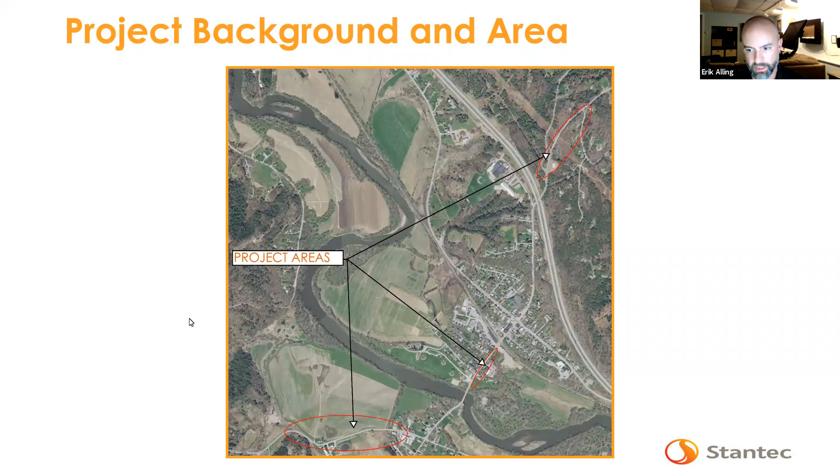All right, I'll jump in here and go through the project areas. As some of you may be aware, there are 3 separate project areas that we're looking at within this one study. Don't worry about trying to squint to see where we are. This is just the overhead view to show the 3, but we have one up on Jericho Road, one on Bridge Street, and one on Huntington Road.

The intent of this is not to be comprehensive existing conditions, it's just to set up the project areas, show some of the existing conditions, and then allow for any feedback, ideas, known issues or concerns with these areas. So starting with project area number 1, we have the entrance to the schools here, I-89, so we are looking at the westerly side of Jericho Road, up the hill and ending at Valley View Road.

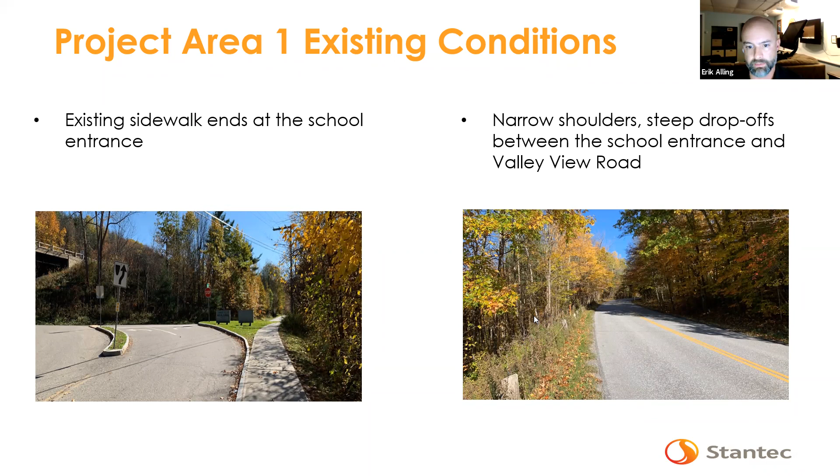Jumping down to street view, there is existing sidewalk on Jericho Road that heads down the hill toward the village. Going up the hill away from the school, the shoulders are quite narrow. There are steep drop-offs just outside of the unpaved shoulder, which you can sort of see here, and it shows up even better in the next picture.

The speed limit is 25 near the school, and it goes up to 35 as you head up the hill away from the school. About 1,100 vehicles per day travel this segment, and the town's right-of-way is 49.5 feet or 3 rods. We do have some overhead utilities to contend with along the side of the road we're looking at, so any alternative we develop will have to take that into account along with these steep drop-offs.

So that sets the stage for this one segment out of the 3. I'd love for people to jump in with any comments, concerns. I'd love to hear if anybody is using or knows of anybody who's using it currently as a pedestrian, or would use it if there were a facility, and any other issues related to pedestrian safety in this segment.

Are there going to be projections for potential use so that we can do a cost analysis in terms of the benefit to the town, in terms of the number of pedestrians that are going to use a sidewalk based upon the cost to construct?

That is typically a tough number to come up with, where there aren't some existing footpaths where people are already walking. We can do our best to estimate based on the number of houses that would connect to this directly, but full disclosure, it's going to be tough to come up with an accurate number.

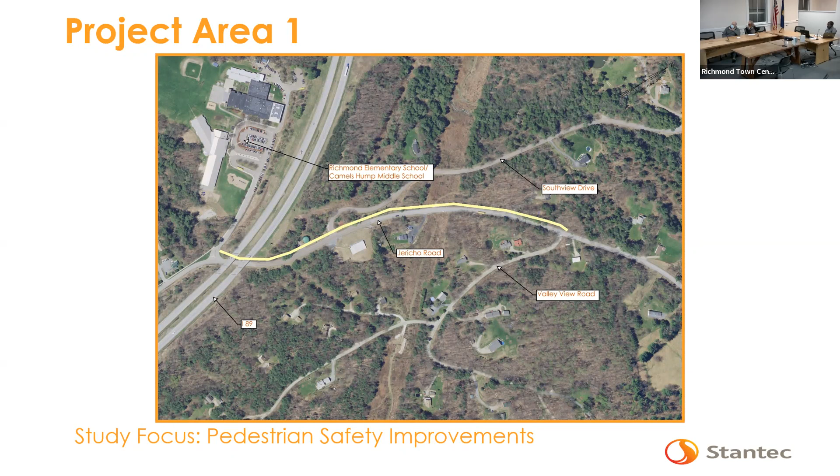Okay, thanks for that. Anything else on this segment? All right, if anybody thinks of anything, I'll leave some time at the very end where we can go through any of the three sections again.

So segment 2 is along Bridge Street. We're looking at the east side here. Jason did allude to the other scoping study, so it may look like we're missing a segment here because existing sidewalk currently ends right at the northern side of the bank entrance. This was picked up as part of a different scoping study, so we will take any of those findings and incorporate them in with ours so that study doesn't get lost or duplicated. But the limit we're looking at is from Jolina Court down to the green.

There are currently sidewalks along the west side, which you can see here. Fairly narrow road with narrow shoulders, but it is nice and flat. There are some destinations within this project area, namely Volunteers Green, the Richmond Market, and the post office. Speed limit through here is 25 the whole way through, and there are about 5,700 vehicles per day that travel through this segment.

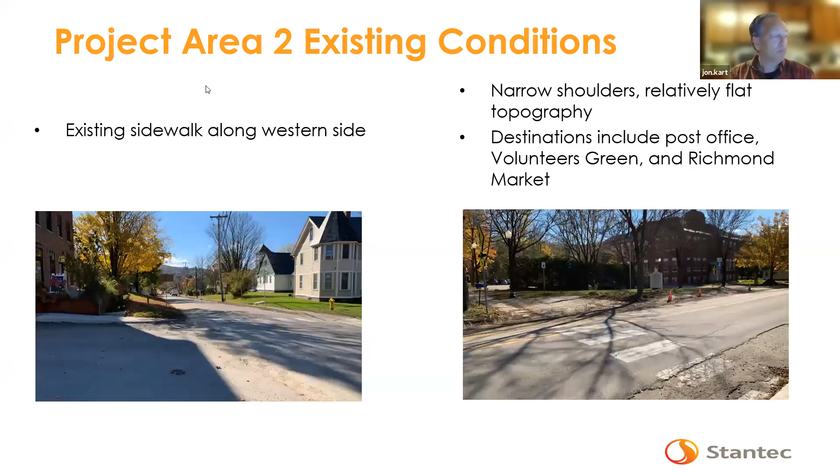Any other comments or questions for this segment? Looks good. And just our final, sorry, go ahead.

Sorry, just one other thought, to look at the other pedestrian crossings in that corridor that would link the two sidewalks. I don't know how many there are, and some have those rapid flashing beacons and some don't, but it would be nice to get an alternative with those included so we could have this section of the corridor with those safety devices.

Yeah, only one has the flashing light beacon, the other one does not. And I know the town is doing them, I think one a year, but it would be nice if we get a grant for it to be all part of the project.

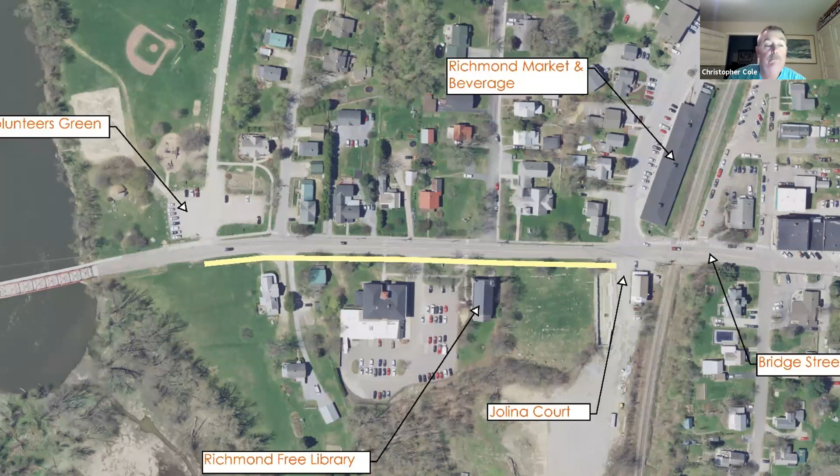Okay, thank you. And I can't speak to how you funded the previous ones. I guess I'd be curious to know actually. I know you do have a few in town. Well, we've been paying for those out of our general funds. There's just been this push to install them for public safety. But yeah, having a grant would be nice.

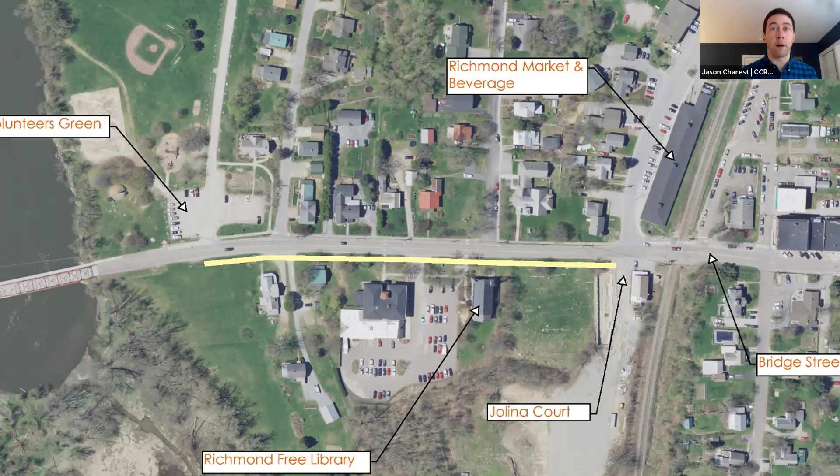Okay, we can clarify whether or not that could be funded through a grant. I can say that they also can be included in any VTrans bike ped or transportation alternative grant, but that would be an 80-20 match in that case if it was part of the overall project.

Actually, I was going to bring up that point, Eric, that the transportation alternative program or bike ped program would fund these RRFBs, but they would be part of the whole sidewalk project. They would not be separate funding for just RRFBs.

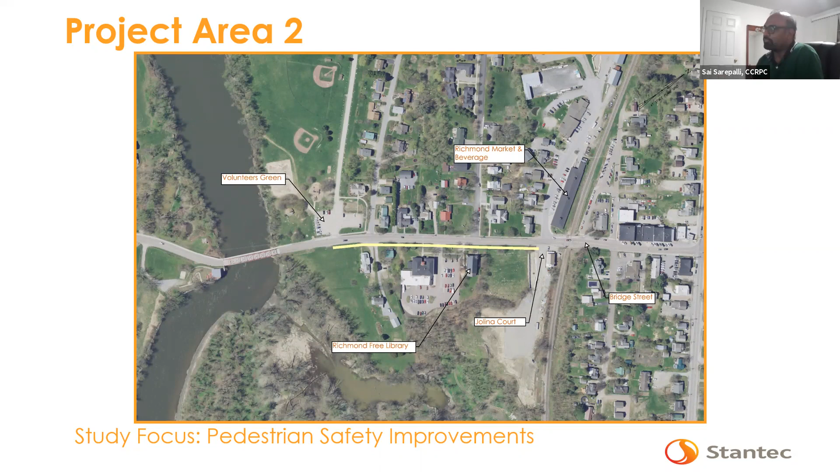Okay, again, if anybody thinks of anything else on that segment, we can certainly come back to it at the end. But for now, we'll move along to the third segment, which is along Huntington Road. We are looking at the northerly side of the road between Stone Corral Brewery and the trailhead for Cross Vermont Trail.

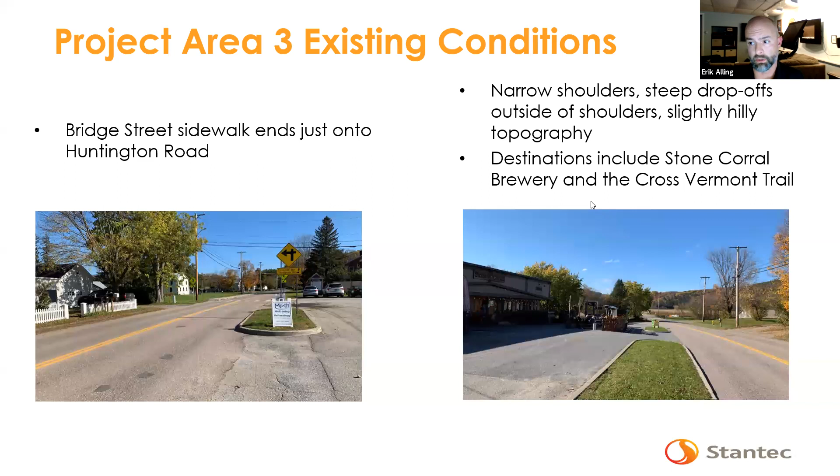So there is existing sidewalk, as I'm sure everybody here knows, that rounds the corner onto Bridge Street and heads right into the heart of the village. There are narrow shoulders along Huntington Road, pretty steep drop-offs, similar to Jericho Road, although not as high, and it's a little bit hillier than Bridge Street. The destinations within this project area include the Stone Corral Brewery and the trailhead for the Cross Vermont Trail.

Speed limit here is 35 miles an hour, just over 3,400 vehicles per day. Like the other two segments, it has a 3-rod right-of-way. Like Jericho Road, but unlike Bridge Street, we do have the utilities to deal with on this side. This picture illustrates the steep drop-offs that we also have to take into account with any improvement we look at. Finally, we're looking towards the trailhead of the Cross Vermont Trail.

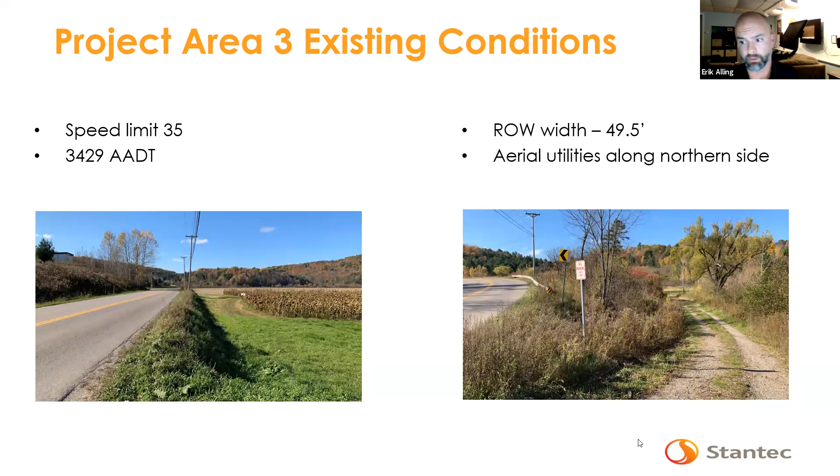So again, we can open it up to any observations or comments or concerns for this segment. So this would be a sidewalk, not like a rec path? Unknown at this point. Because there are a lot of bikers that come off there and come into town, so I don't know what use would be better for that.

Yeah, if there's a way to fit a multi-use path in there, a multi-use path would definitely be useful. There is quite a bit of bike traffic as well as walkers going to the Cross Vermont Trail. I was curious about that, so thank you for bringing that up. I thought this might be a little bit more attractive area for cyclists.

Yeah, if you want, Erik, one source is to look on Strava. You can see those heat maps. Yep, I've heard that's like very red, that section of the Cross Vermont Trail, because that's used quite a bit.

What, I assume there's various levels of recreation path. And again, I understand it's wide open right now, but would something like this be a path that allows travel in 2 directions by bikes and pedestrians? Potentially, yes. Yeah, that would sort of fall into the standard 10-foot width of shared use path, which would give enough space for all types of users.

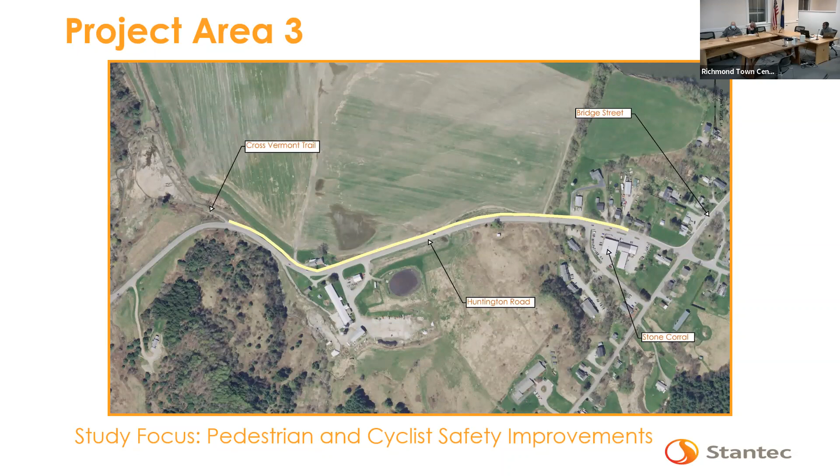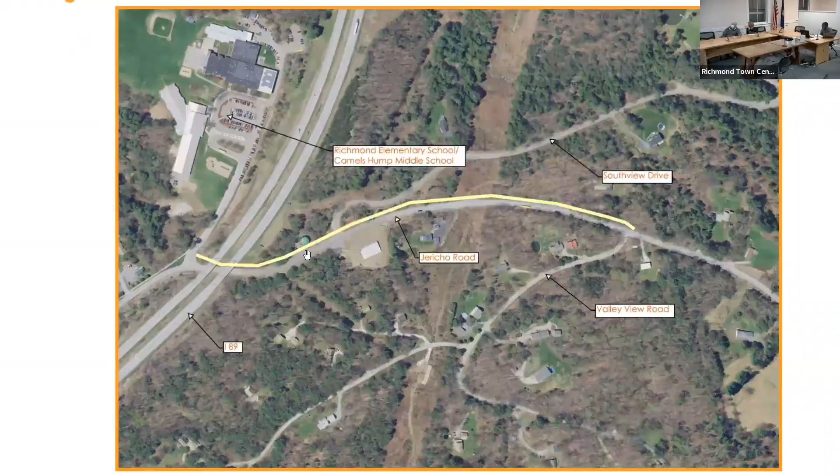Has anybody thought of anything from one of the previous two segments we should go back and talk about? I was thinking at the entrance to Southview on the Jericho Road side, there's where the green space used to be, partway up from the interstate - it's not a water tower anymore, it's now a parking lot. We looked at that as a trails committee for a potential parking area for trail access, and it was decided there weren't safe sight lines to drive out of there, but potentially a path could go off into Southview through there so you don't have to access it where the cars access Southview, cutting off that intersection part.

That sounds like a good idea to me, because when I'm walking from my home on Jericho Road up to Southview, that's the most dangerous part of my walk - when I first turn onto Southview, there's that sharp curve. Right in this area. And if I've already gone up into Southview and I'm on my way back home again, that curve as I'm approaching Jericho Road - right in there.

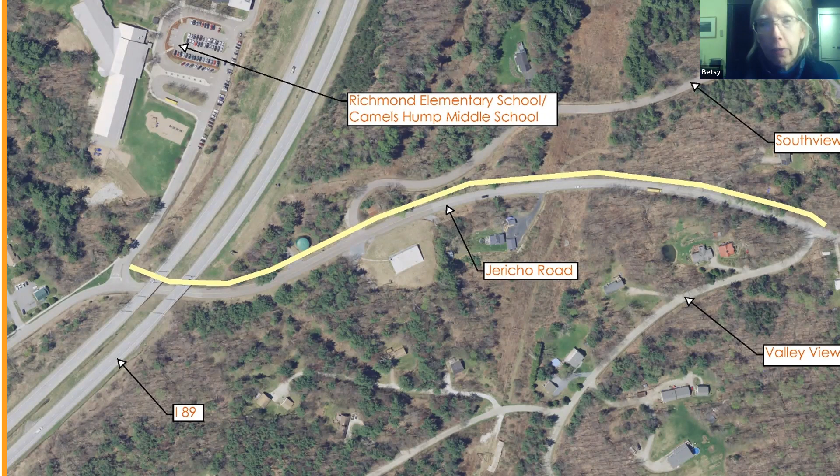If a car is coming the same direction I'm walking, or coming the other way - I try to walk facing traffic, but on that curve I usually don't walk facing traffic. It's just a dangerous curve.

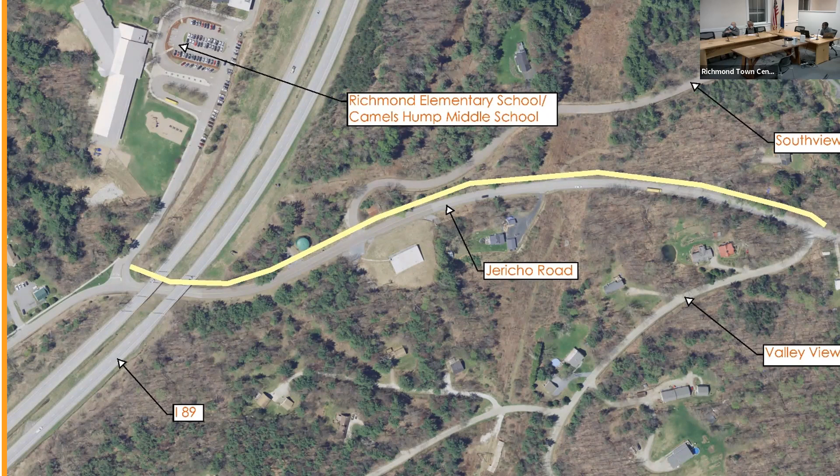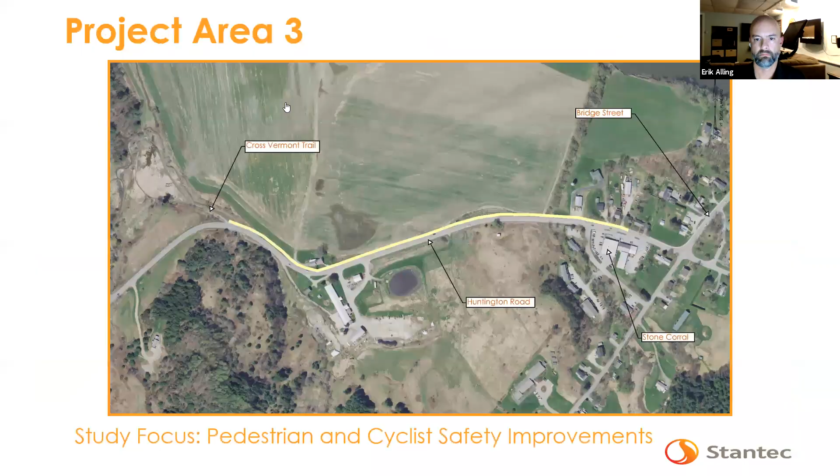Anything else? Well, thank you, that was great feedback that we'll be able to use going forward.

In terms of what comes next, Jason covered a little of this in the timeline slide, but we're going to take the ideas and concerns we got here tonight and start looking at those to develop solutions. These will ultimately turn into alternatives, which will be refined through meetings with the project team, and we'll end up with ideally two alternatives minimum per segment, then refine those and bring them back sometime in the spring. There'll be another public meeting, and it would be great to have everybody back to comment on what we've developed.